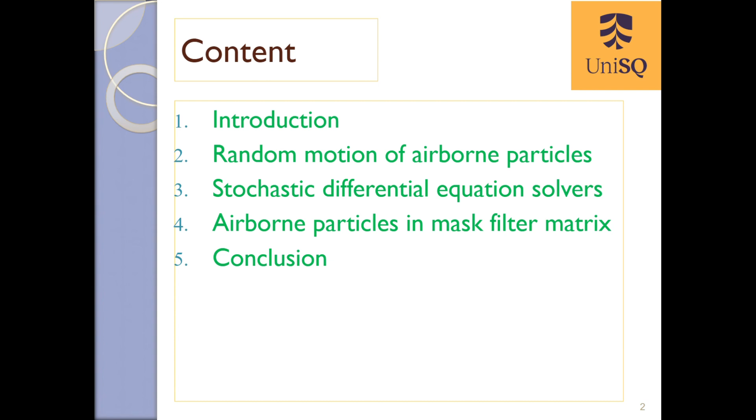My talk includes 5 sections. The first one, introduction. The second one is the random motion of airborne particles. Then SDE solvers. The next one is airborne particles in mask filter matrix. And the last one is the conclusion. Let's start with the introduction.

The airborne particles are extremely small, under 10 micrometers, and can be suspended in the air from 30 minutes to an hour. The motion of a particle is the result of random and rapid collisions due to the density fluctuation in the fluid. According to the new research, the smallest size of a respiratory particle that can carry SARS-CoV-2 is around 4.7 micrometers.

Normally, the ODEs cannot satisfy the small-scale simulation because the random elements are ignored. In this study, we will present a stochastic approach by incorporating the Langevin equation into the flow field to simulate the movements of the airborne particles and see how it interacts with the fiber matrix to improve the air filtration performance.

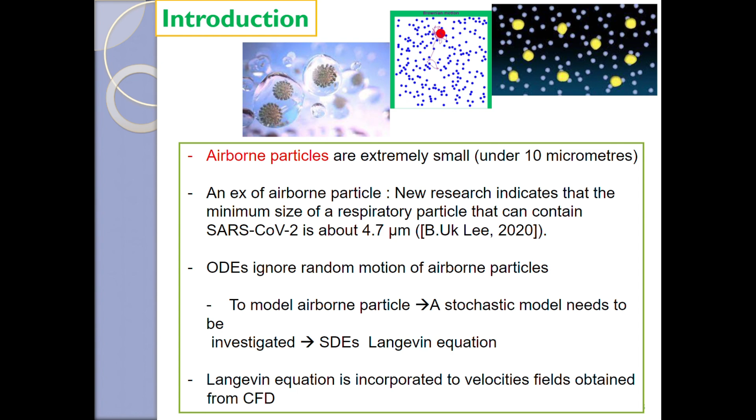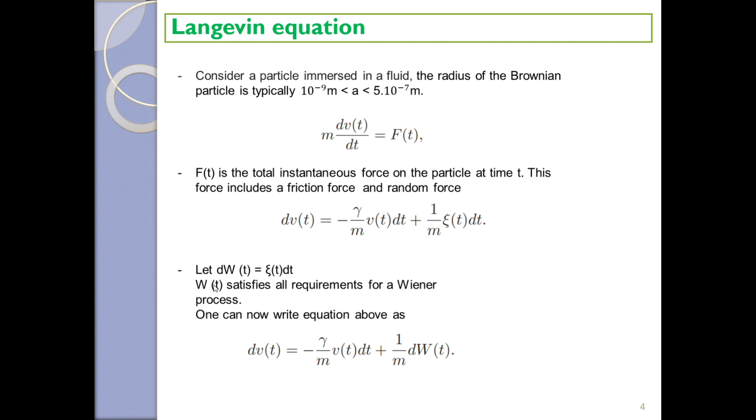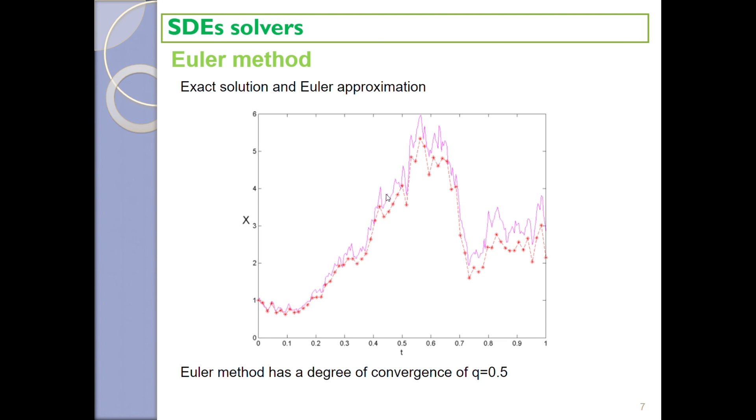The Euler and the Milstein methods are two simple and successful approaches for approximating solutions of SDEs. This is the general form of the Euler method. Then we will apply this method to the Black-Scholes equations. These equations have the exact solution. And this figure shows the exact solution and the Euler approximation. The convergence rate is 0.5.

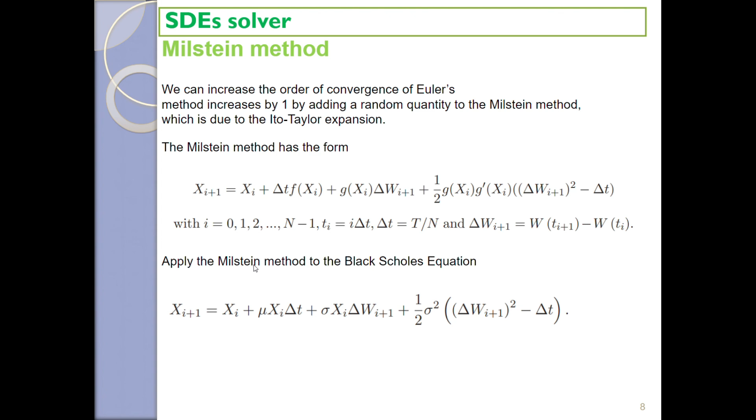It's possible to raise the strong order of the Euler method to 1 by adding a correction to the stochastic increment. This correction comes from the Ito-Taylor expansion. We also apply the Milstein method to the Black-Scholes equation. And we have the exact solution and the approximated solution. The Milstein method has a degree of convergence of 1.

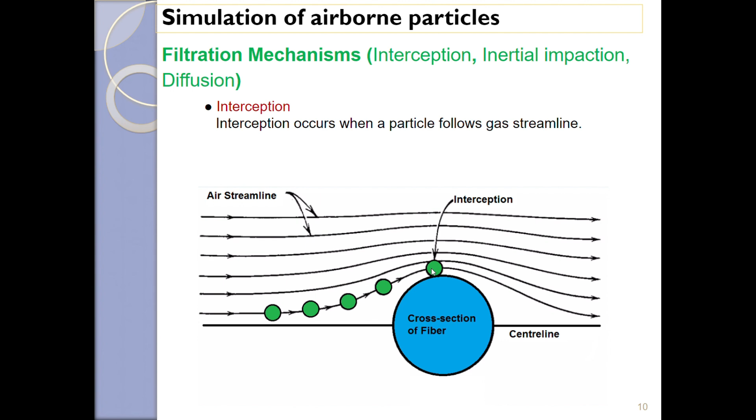The most dominant filter mechanisms are interception, inertial impaction, and diffusion. The interception occurs when a particle follows the gas streamline. The interception of particles is common for large particles. And the next one is the inertial impaction. The inertial impaction occurs when a particle is so large that it is unable to quickly adjust to the changes in the streamline direction. The particle, due to its inertial impaction, will continue along its original way, then hit the filter fiber.

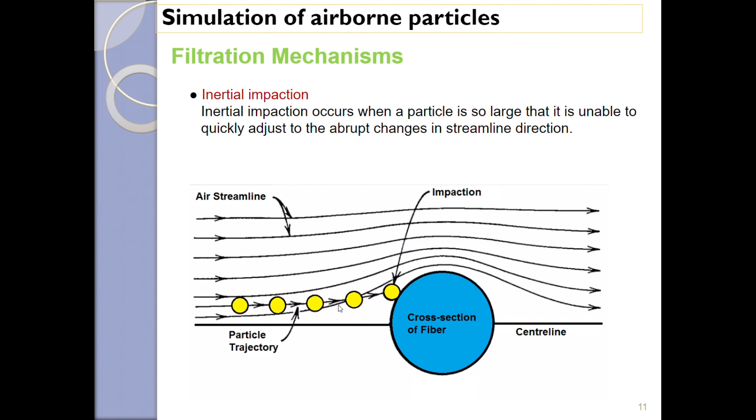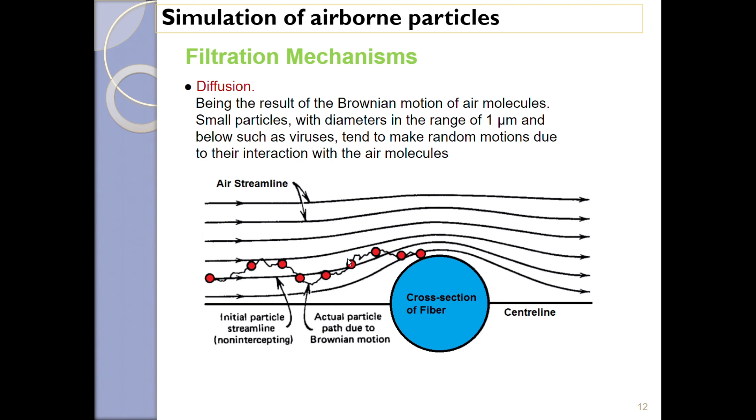The next mechanism is the diffusion. The small particles with diameters in the range of 1 micrometer or below will tend to make random motions due to their interaction with the gas molecules. Diffusion towards porous media occurs for very small particles, such as viruses.

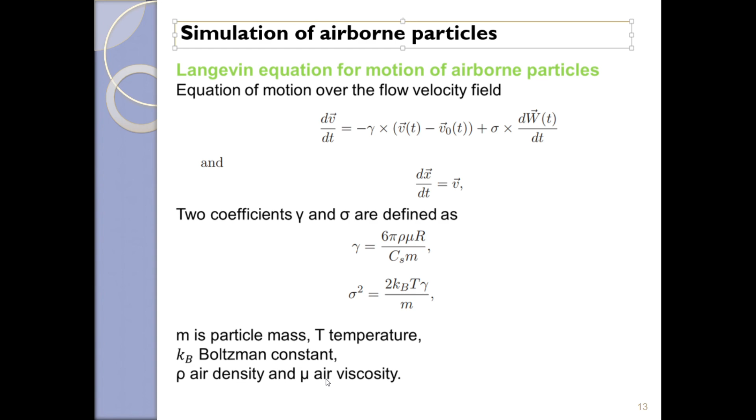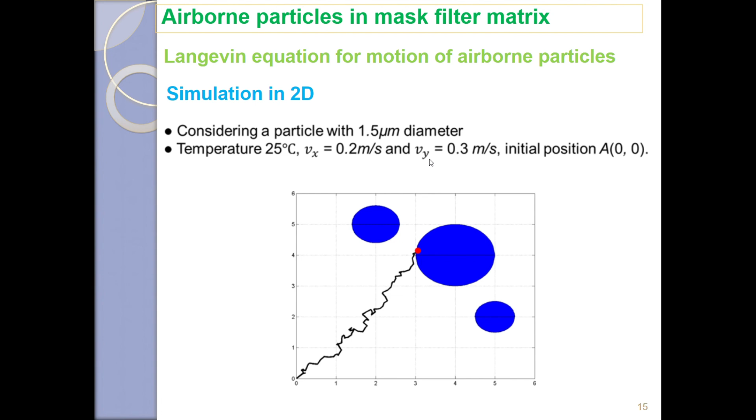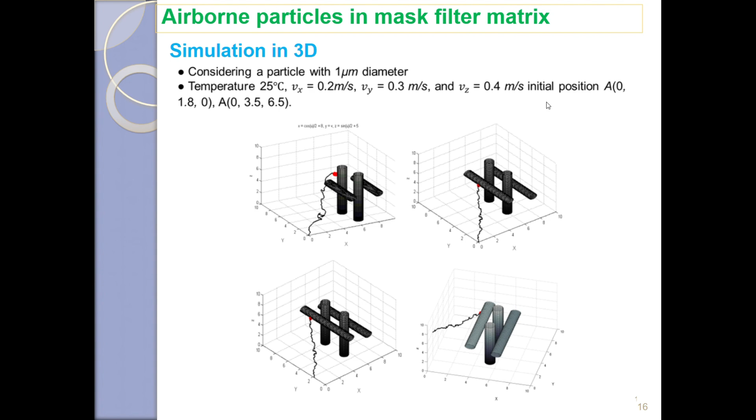Similarly, we have the 3D simulation. The air velocity is Vx, Vy, and Vz. And the particle comes from different initial positions. And this is the matrix of filter fibers. We consider the particles originating from different random locations A, B, and C.

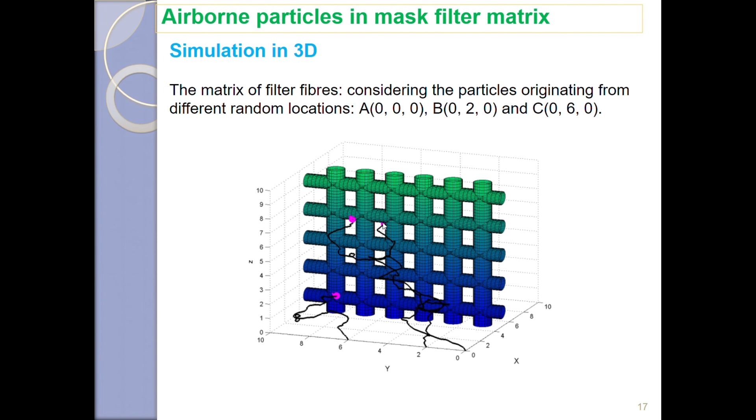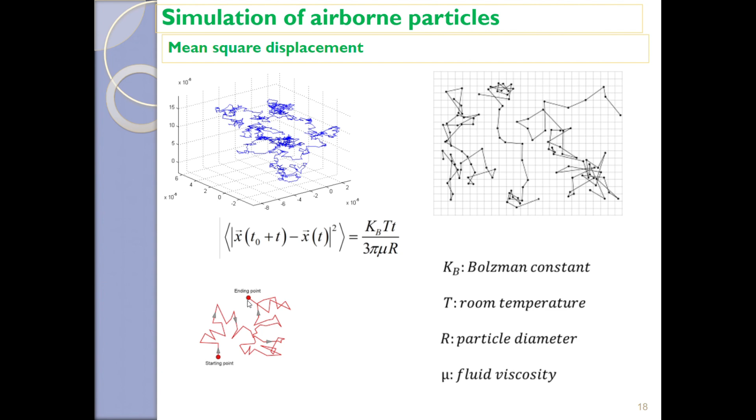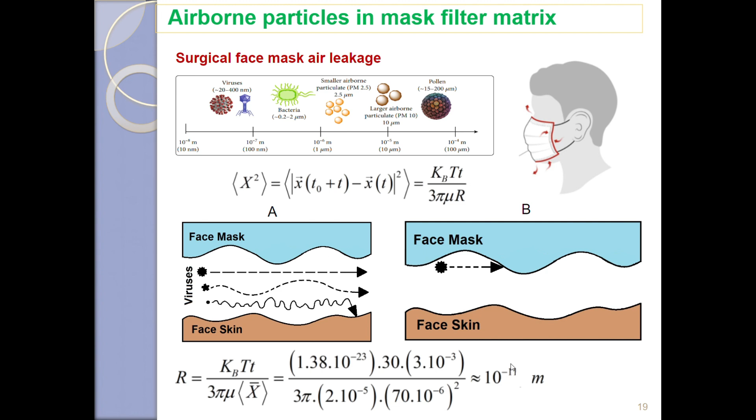In this formula, we suppose the distance between two surfaces is 70 micrometer. Then we will have the estimated particle radius of 10 to the power minus 11 meter. This is the difference in the face mask filter, where the open channels may on average have a diameter of 1 micrometer. This could enhance the diameter of a particle, which will make the Brownian motion important for particles smaller than 0.1 micrometer.

If we consider the pore size is 1 micrometer, then we will have the estimated diameter of 10 to the power minus 8 meter. This is the size of the viruses.

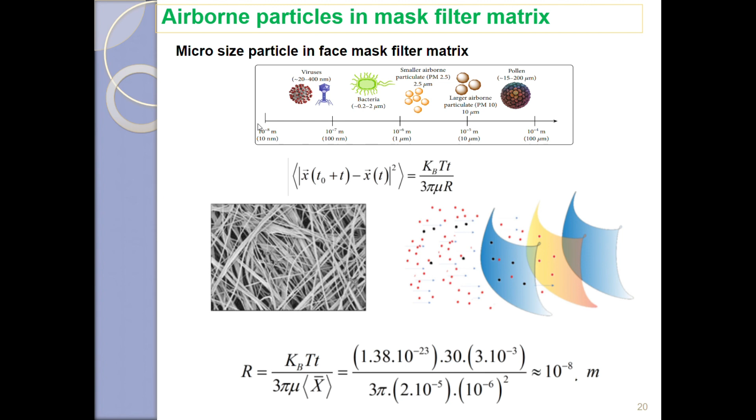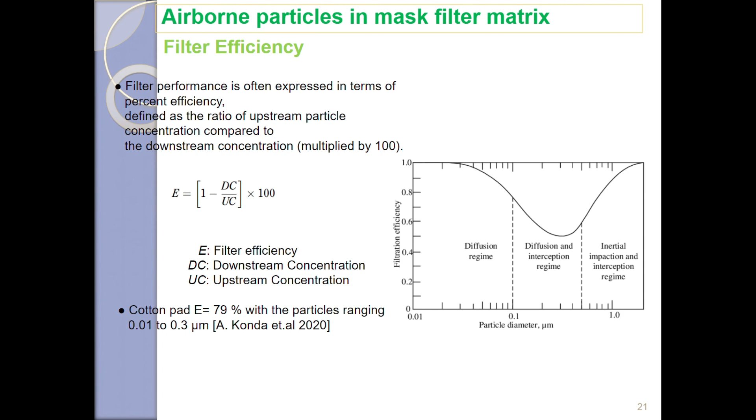The last section is the conclusion and the future work. In this work, by solving the stochastic differential equations, we were able to simulate the random motion of the airborne particles and see how they interact with the filter fiber matrix. The movement of the particles is computed in 2 dimensions as well as in 3 dimensions.

In future work, we will also conduct PIV, particle image velocimetry, as a particle counting method by adding a tracer, illuminating the fluid with a laser sheet, then capturing the images of the tracer particle movement. By counting the number of particles in the images, we could estimate the concentration of the particles in the fluid.

Then we will do this test with different kinds of masks, for example, the cloth mask, the blue surgical mask, N95 mask, and nasal filter. Then we will compare with the simulation to examine how the airborne particles interact with the fiber matrices of the face masks, leading to improved filtration performance and better mask designs.